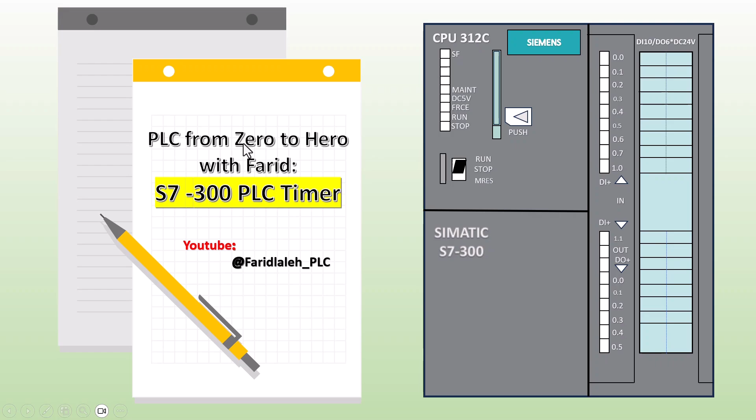Today, we're diving into something powerful, a key concept found in almost every real-world automation system. PLC timers, the software-based solution for precise time control. In this video, we'll focus specifically on Siemens S7-300 PLC timers and how they work in real projects.

Forget the old, bulky hardware timers. With PLCs, all your timing logic happens inside the software. It's smarter, faster, more reliable, and easier to maintain. But do you really understand how timers work in automation? From simple machines to complex factory lines, timers are essential for handling delays, sequences, and safety operations.

Before we dive into the theory of timers, let me show you a simple animated example to help you understand how they work. In this project, imagine that I've written a program and downloaded it to a Siemens S7-300 PLC. I'm using this animation style to make the tutorial more exciting and easier to understand for everyone.

It's just like a real project, and after introducing each timer, I'll use these animations to show you how they work in real-world hardware situations. In this example, we have an electrical motor and two push buttons. For safety reasons, we don't want the motor to start immediately after pressing the start button. Instead, we want the PLC to wait 10 seconds and then start the motor.

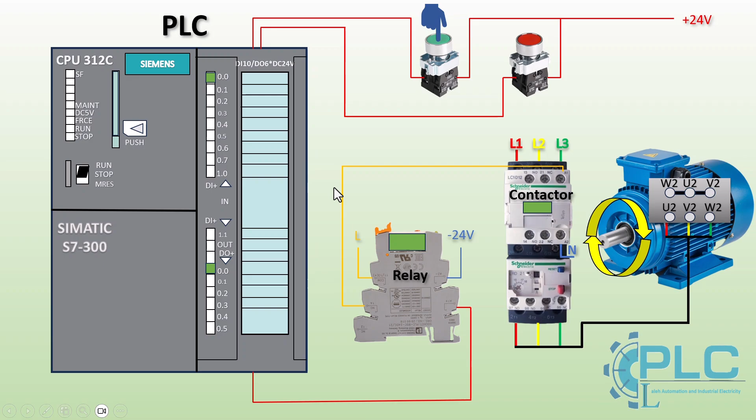Every PLC comes with a set of built-in software timers. The exact number depends on the model. For instance, certain Siemens S7-300 PLCs support up to 512 timers, whereas higher-end CPUs in the same series can handle 1024 or even more.

The Siemens S7-300 PLC includes 5 types of software timers, each designed for different control needs based on your project requirements. Pulse timer, extended pulse timer, on delay timer, retentive on delay timer, off delay timer. Each of these timers serves a specific purpose.

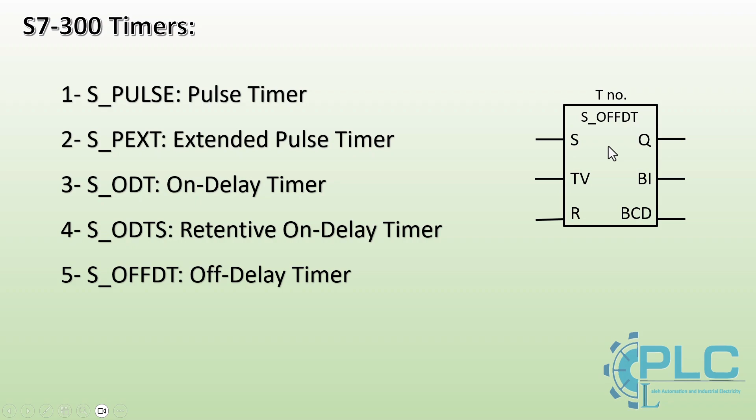Let's begin by explaining the inputs and outputs of the timers. All S7-300 PLC timers use the same inputs and outputs. The main difference is how and when they act. The first input is the start input. When this input is activated, the timer begins counting, except in the case of the off delay timer, which works differently. I'll explain that exception shortly.

The second input is TV, time value. This is where we define how long the timer should count. We enter the time using the S5T format, which I'll explain in the next slide. The third input is the reset input. When this input is activated, the timer turns off even if the time has not finished. To activate the timer again, the start input must be re-triggered.

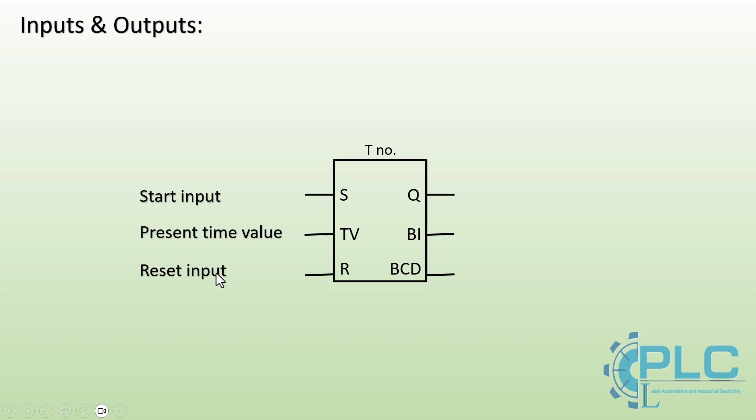The first output is Q, timer status. It indicates whether the timer is currently active. The behavior of this output depends on the type of timer being used. For example, in some timers, Q turns on immediately when the input is triggered, while in others, it only turns on after the preset time has elapsed.

The second output shows the remaining time in integer format. You can assign this to a memory word and use it inside the PLC program. The third output also shows the remaining time, but in BCD, binary-coded decimal, format. This format is useful for connecting to HMI displays, where you want to show the countdown in a readable number format. So now we've covered the inputs and outputs of Siemens timers.

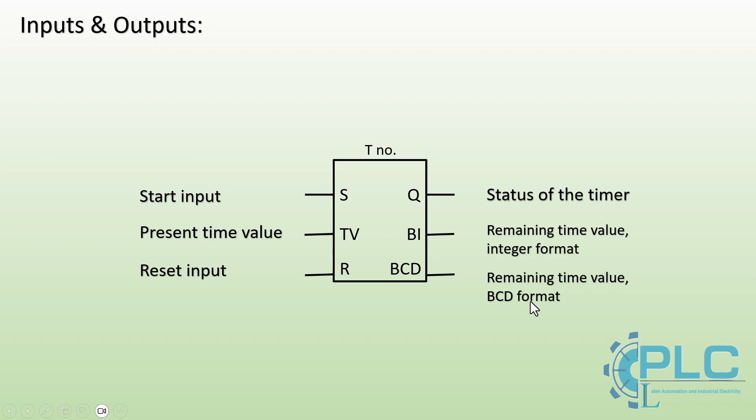Let's look at this sample program. It's written in ladder logic, which is one of the programming languages supported by Siemens PLCs. In this program, I124.0 is used as the start input. When it's on, the timer activates and starts counting. The TV input is set with a time value in S5T format.

I124.1 is used as the reset input. The output is assigned to Q124.0. When the timer is active, this output turns on.

The BI binary integer and BCD outputs are not used in this tutorial, but I'll cover them later when we focus on timer monitoring. For now, just know that you can assign memory words to them and display them on your HMI if needed.

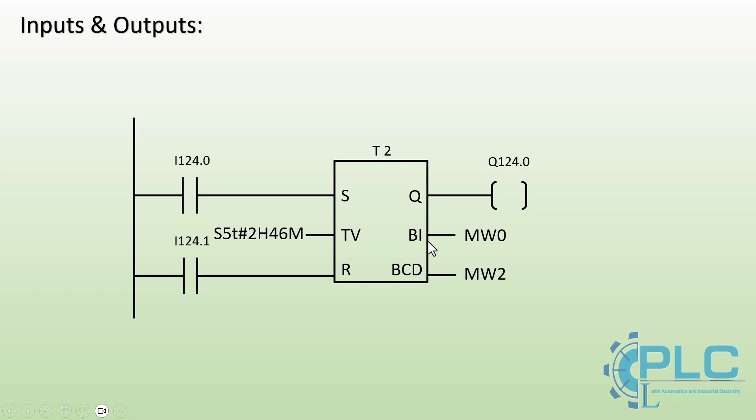In Siemens S7-300 PLCs, timers use a special time format called S5T to define the time value. The S5T format allows the PLC to understand exactly how long the timer should run. The general structure looks like this: S5T# AH, BM, CS, D MS. Here's what each part means.

AH: hours. Replace A with the number of hours, then add H to indicate that the value is in hours. Example: S5T#2H means 2 hours. BM: minutes. Replace B with the number of minutes, then add M to indicate minutes. Example: S5T#15M means 15 minutes.

CS: seconds. Replace C with the number of seconds, then add S to indicate that the value is in seconds. Example: S5T#10S means 10 seconds. D MS: milliseconds. Replace D with the number of milliseconds, then add MS to indicate the value is in milliseconds. Example: S5T#250MS means 250 milliseconds.

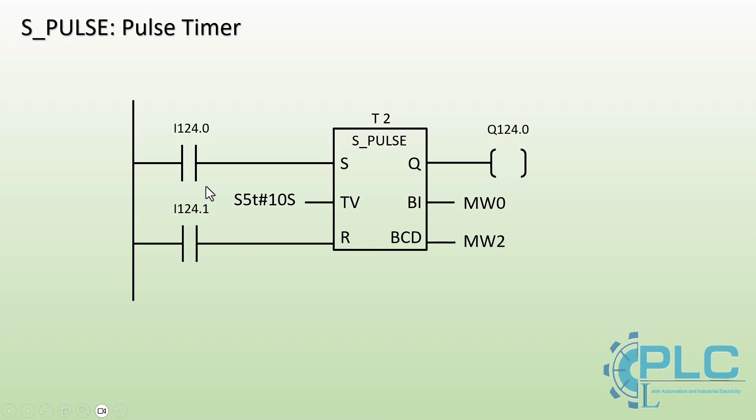Imagine the previous ladder logic program using the pulse timer has been downloaded to the PLC. In this program, I want the motor to run for exactly 10 seconds when I press the start button, even if I keep holding the button down. Let's test it.

As you can see, when I pressed the start button, the PLC started counting and the motor kept running until the timer finished. This is a typical real-world application of the pulse timer, useful when you need a fixed output duration, regardless of how long the input stays active. Now let's move forward and explore the extended pulse timer, which gives us even more control over output timing and behavior.

The extended pulse timer, written as S_PEXT, works very similarly to the pulse timer but with one important difference. When the start input is activated, the timer output Q turns on immediately and stays on for the preset time. However, unlike the standard pulse timer, the start input does not need to remain active during the timing period. Once the timer has started, the output will stay on until the time expires, even if the start input is turned off.

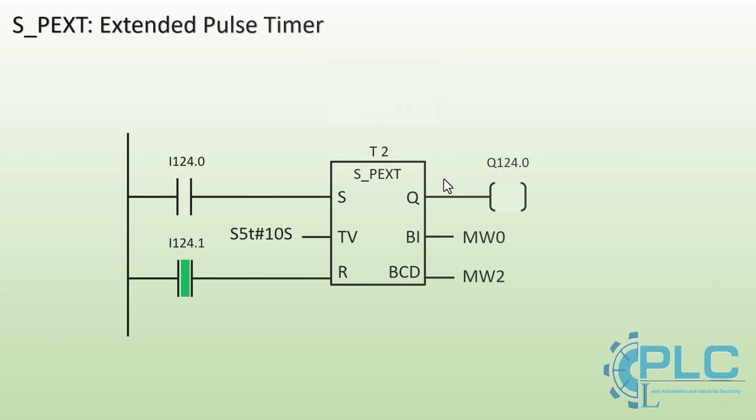Let's imagine I've already downloaded this ladder program to the PLC. Now, I'm going to test it. I press the start button and then release it. As you can see, the motor starts running and the timer begins counting down. After the full 10 seconds have passed, the motor turns off automatically. The key point here is, even though I released the start button right after pressing it, the PLC continued running the motor until the preset time expired.

Now, let's try another scenario. I press and release the start button again, but before the timer finishes, I press the stop button. As you can see, the motor immediately stops, even though the timer was still counting.

Now here's a challenge for you. Open SIMATIC Manager and try to write this exact program yourself. Here's your task. Define a 1-minute time value for the extended pulse timer. Start the simulation, and when the timer reaches 30 seconds, toggle the start input off and then on again. Observe what happens and write your result in the comments.

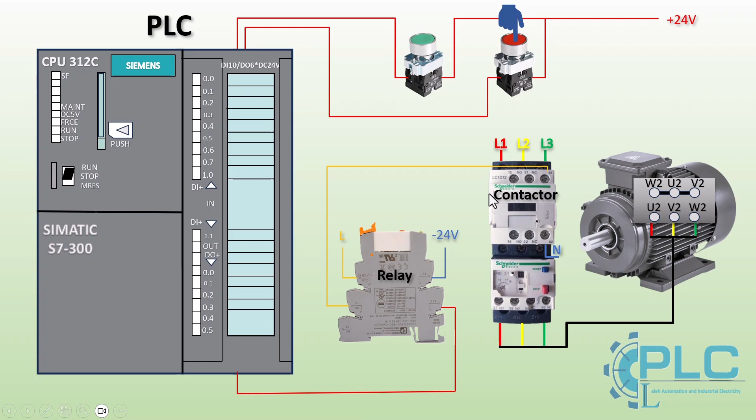Let's continue with the on-delay timer. In the pulse timer and extended pulse timer, when we activate the start input, the output turns on immediately and stays on until the preset time expires. But in some projects, we need the opposite behavior. We want the output to turn on after a delay, not right away. That's where the on-delay timer comes in.

Here's how it works. When the start input is activated, the timer begins counting. Once the preset time has passed, the output turns on and it stays on as long as the start input remains active. If the start input is deactivated, or if the reset input is triggered, the timer resets and the output turns off.

Let's test the on-delay timer. I've inserted the on-delay timer and set the time value to 10 seconds. Now I activate input I124.0, the start input. As you can see, the timer begins counting, but the output remains off while the timer is running.

Once the 10 seconds are complete, the output turns on and stays on as long as the start input remains active. The key point here is that the start input must stay active for the output to remain on. If I deactivate the start input, the output turns off immediately. And to activate the timer again, I need to re-trigger the start input.

Now let's move to the next slide and test this on-delay timer in the simulation. In this example, when I press the Start button, the PLC will wait exactly 10 seconds, and then it will start the electric motor. So, imagine I've already written this program and downloaded it to the PLC.

Now let's see how it works. I've pressed the Start button, and the timer is now counting. The PLC is waiting for the 10-second delay to send the command to start the motor.

Now, the motor is running, and it will keep running as long as I hold the Start button. Once I release the button, the motor will stop.

Let's continue with the retentive on-delay timer, also known as S_ODTS in Siemens PLCs. The retentive on-delay timer works almost the same as the regular on-delay timer, but with one key difference. In both timers, when the start input is activated, the timer begins counting. Once the preset time is complete, the output Q turns on.

But here's the key difference. In a regular on-delay timer, the start input must remain active the entire time. If it turns off before the time finishes, the timer resets. In a retentive on-delay timer, the start input only needs to be triggered once. You can turn it off, and the timer will continue counting until the defined time expires. After the full time has passed, the output turns on and stays on until the reset input is activated.

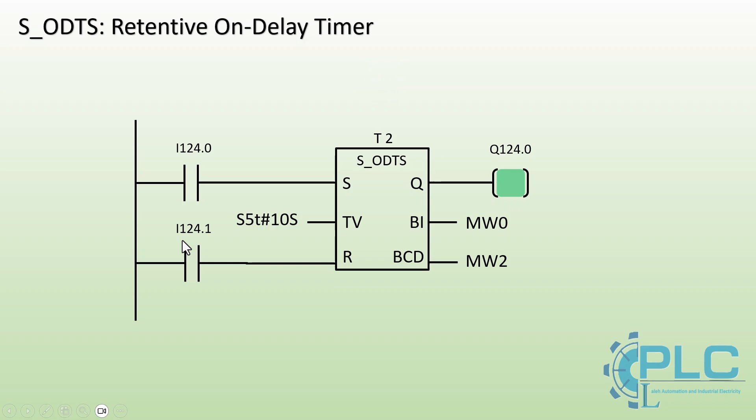I have inserted the retentive on-delay timer, and now I want to test this project. First, I trigger the start input. The timer begins counting. After the preset time finishes, the output Q turns on and stays on until I activate the reset input.

And because this timer doesn't require the start input to stay active, I turned it off after starting the timer, and as you can see, the timer continued running. Let's move on to the next slide and test this timer again. I first press the start input and then release it, and the timer begins counting.

As you can see, after the timer finishes counting, the output becomes active and stays on. Now, I'll press the stop button. Let's see what happens. I've pressed the stop button, and as expected, the PLC output deactivates and the motor stops running. We've finished covering both on-delay timers.

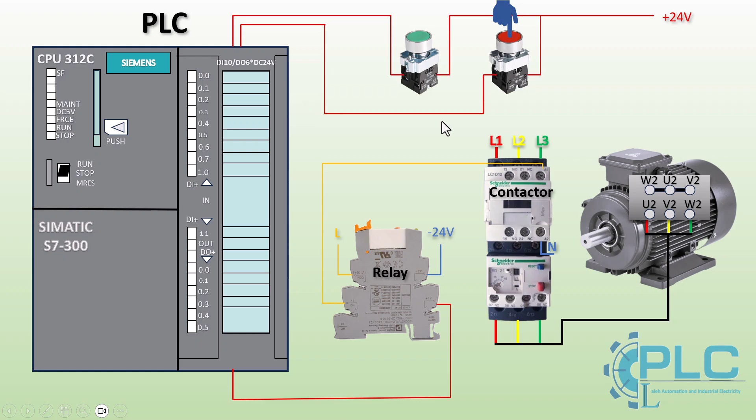Finally, let's take a look at the off-delay timer, the last timer in the Siemens S7-300 family. It works differently from the others, and it's very useful in specific automation scenarios. Let's see how it behaves. Off-delay timer, S_OFFDT. The off-delay timer works a bit differently from the others.

When the start input is activated, the output Q turns on immediately. When the start input is deactivated, the timer begins counting down the preset time. The output stays on during this countdown and only turns off after the time expires or the reset input is activated.

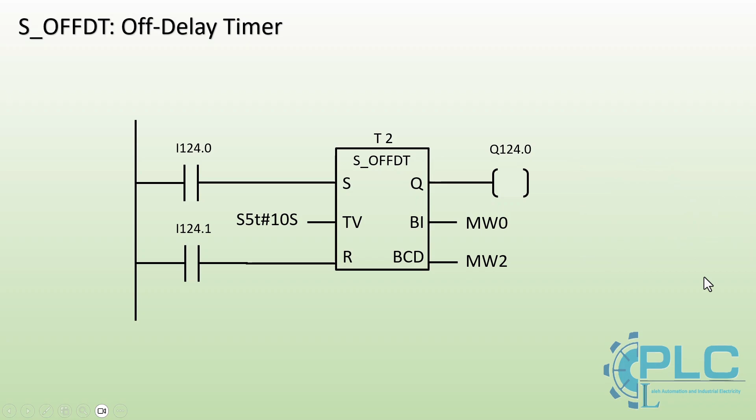Let's test this timer. I activate the start input I124.0 and the output turns on immediately, just as expected. Then I deactivate the start input. Now, the timer begins counting down. After the preset time finishes, the output turns off automatically.

As you can see, the off-delay timer is perfect for situations where you need to keep something running after the input signal turns off, like cooling systems or fans. Now, let's test another case. I activate the start input again, and the output turns on immediately. Then, I deactivate the start input, the timer starts counting down.

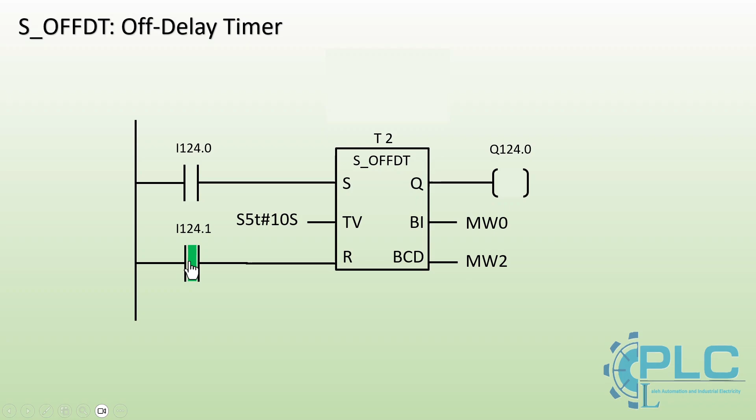But this time, before the countdown finishes, I activate the reset input. The output turns off immediately, even though the time had not yet expired. This shows how the reset input can interrupt the countdown and immediately stop the output, giving you full control when needed. Let's test it in the simulation.

I press the start input. As you can see, the PLC immediately commands the output to turn on and keep it active. The timer is now ready to begin timing. Then, I deactivate the start input, and the timer starts counting down. After the preset time expires, the output automatically turns off.

We've now seen the last timer, and that means we've covered all of them. Each one is simple to understand and incredibly useful in real automation projects. Up to this point, we've covered the theory behind each timer. Now it's time to move into practice. Let's open SIMATIC Manager and start working with timers directly inside the real Siemens S7-300 programming environment.

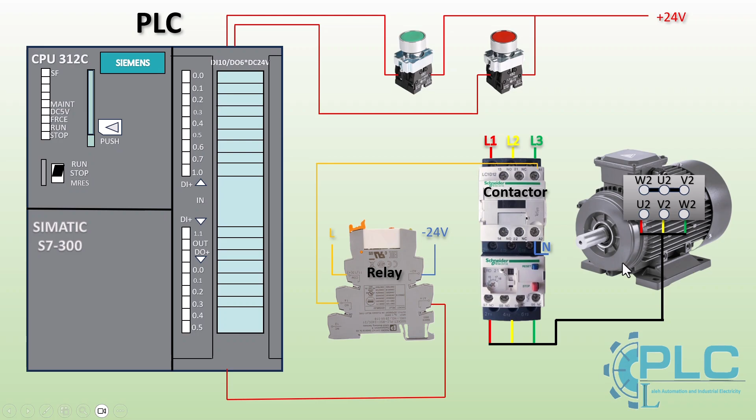Before we move on to SIMATIC Manager, I have a challenge for you. Open the SIMATIC Manager program and create this simple project. Imagine you have one light, a start button, and a stop button. When the start button is pressed and released, the light should blink on and off every second for 1 full minute. After 1 minute, the blinking should stop, and the light should stay constantly on until the stop button is pressed.

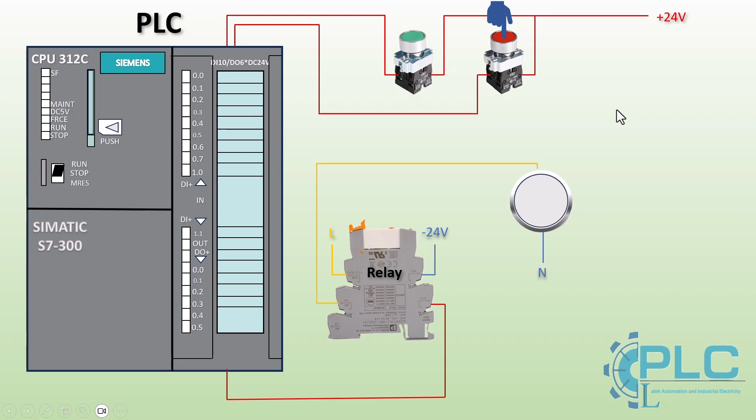Pause the video now, try building the project, and then continue watching. If anything is unclear, feel free to go back and rewatch the earlier sections. This is a very important and practical skill in real automation projects. And don't forget, if you need help, I'm here to support you every step of the way.

In the previous video, I already explained how to create a new project in SIMATIC Manager and complete the hardware configuration step by step. To save time in this video, I'll go straight to OB1 block and begin programming. If you're not familiar with those steps or you're having trouble, just go back and watch the previous video. I've explained everything clearly there.

To select the required timer from the program, open the timer folder in the Program Elements section, also known as the instruction tree. Once you open the folder, you'll see all 5 types of S7-300 timers. Pulse Timer, S_PULSE. Extended Pulse Timer, S_PEXT. On Delay Timer, S_ODT. Retentive On Delay Timer, S_ODTS.

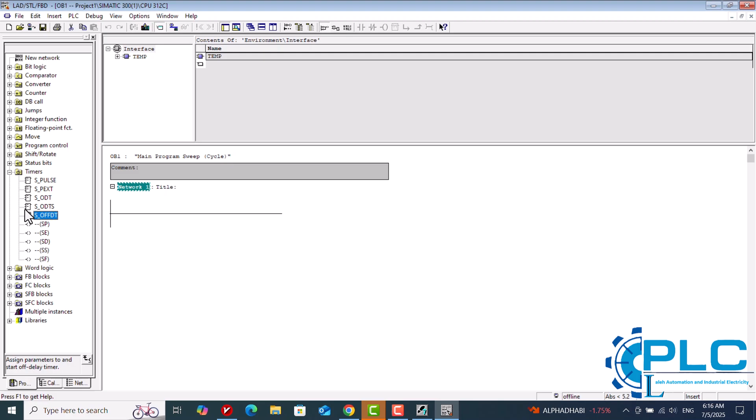Off Delay Timer, S_OFFDT. To insert a timer, click on the network where you want to place it. Then either double-click the timer or drag and drop it into the program. I've inserted an S_ODT timer into Network 1. Now, we need to define its inputs and outputs.

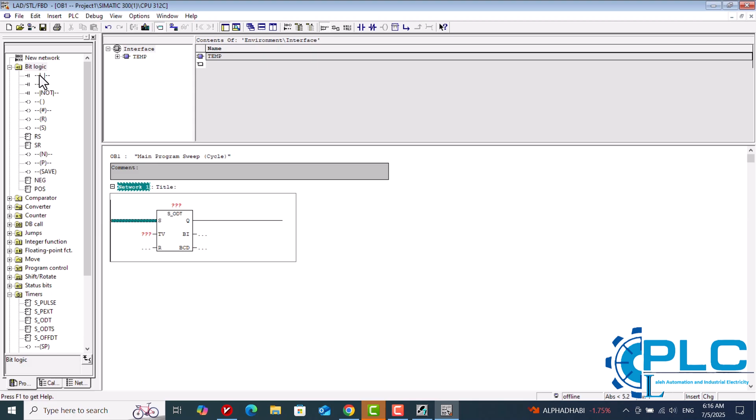Start input. Add a normally open contact and assign it the address I124.0. Time value TV. For this example, I want the timer to delay for 20 seconds, so I'll write S5T#20S. Reset input. Again, insert a normally open contact and assign the address I124.1.

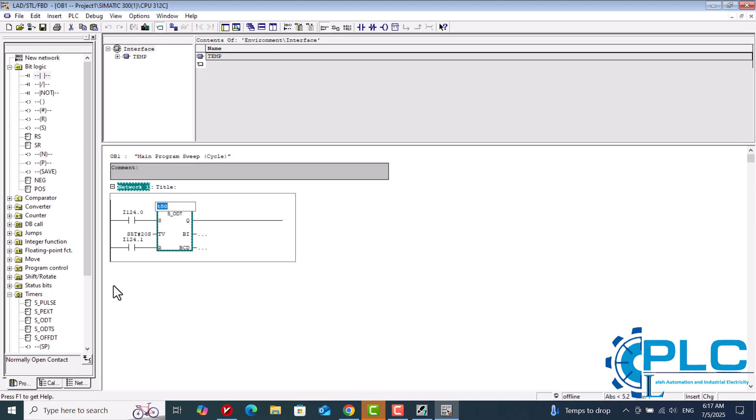With the inputs done, now it's time to assign a timer number. Timer numbers in S7-300 PLCs start from 0 and go up, depending on how many timers your CPU supports. For this project, I'll use T50. So I simply type T50 as the timer number. Lastly, we'll use the Q output of the timer. Insert a coil and assign it to Q124.0. This will turn on when the timer completes its delay.

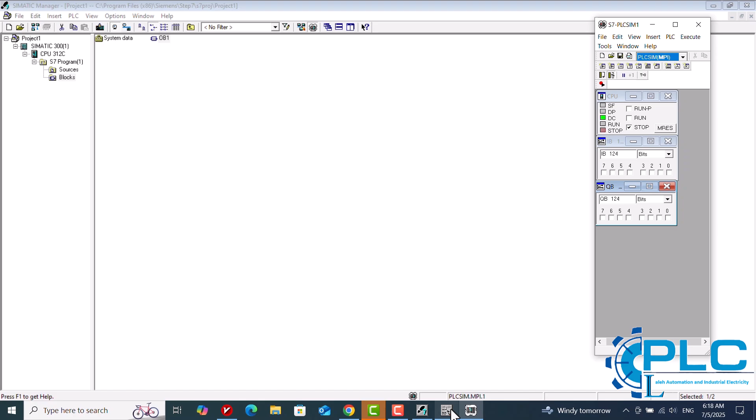Let's test this timer in the SIMATIC Manager simulation. First, I open the simulation window. Then, I change the connection protocol to PLCSIM MPI so it connects properly to the simulated CPU. To make things easier, I also go to the View menu and select Always on Top. This keeps the simulation window visible above all other windows. Now, it's time to download the program to the simulation.

Once the program is downloaded successfully, I run the CPU, and then I activate the start input to test how the timer behaves. As you can see, the timer is counting down. During this time, the output remains inactive and it will only turn on after the full time has passed. Once the time finishes, the output is activated and stays on as long as the start input remains active.

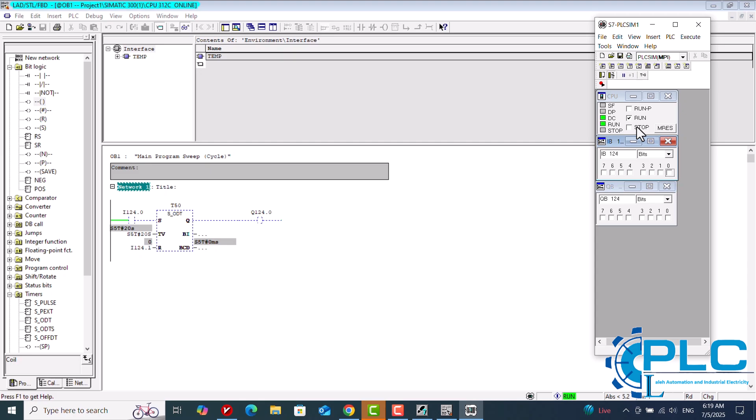Everything I explained earlier in theory works exactly the same way here in the SIMATIC Manager program. As you can see, it's simple and practical. Now you can apply it to any project based on your needs. Finally, let's insert an off delay timer and test it as well just for more practice. I've inserted a new network, and now I want to add an off delay timer S_OFFDT to this network. Let's configure the inputs and outputs.

I've defined the start input at address I124.2. I've set the time value to 20 seconds, S5T#20S. For the reset input, I'm using address I124.3. And for the output, I've assigned Q124.1. Now let's download the program and test it in the simulator.

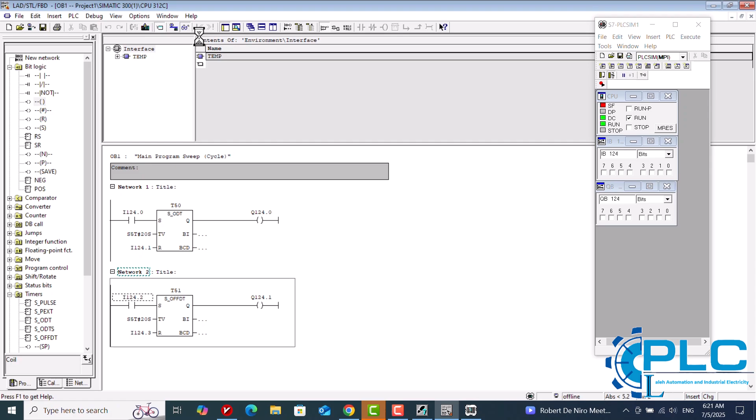First, I activate the start input. And as expected, the output turns on immediately. Then, I deactivate the start input, and the timer starts counting down from 20 seconds. Finally, once the timer finishes, the output also turns off. That's exactly how the off-delay timer works. Simple, useful, and easy to implement in real projects.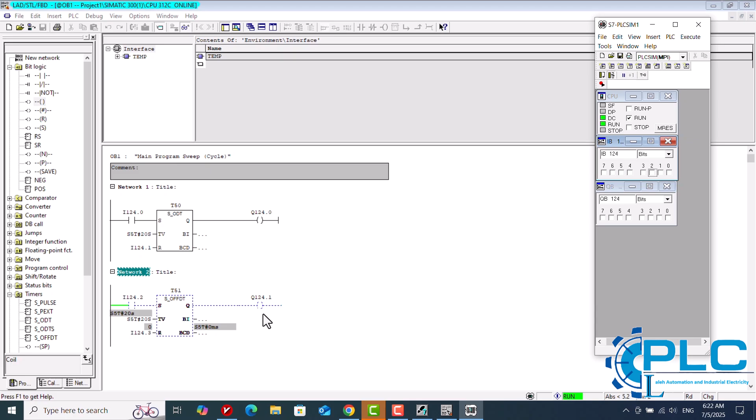Today, we covered all 5 types of timers in the Siemens S7-300 PLC, including how they work, how to configure them, and how to test them both in theory and in the SIMATIC Manager program. As you saw, timers are powerful, flexible, and essential tools in real-world automation projects. Whether you're just getting started or looking to strengthen your skills, mastering timers is a big step toward becoming a professional PLC programmer.